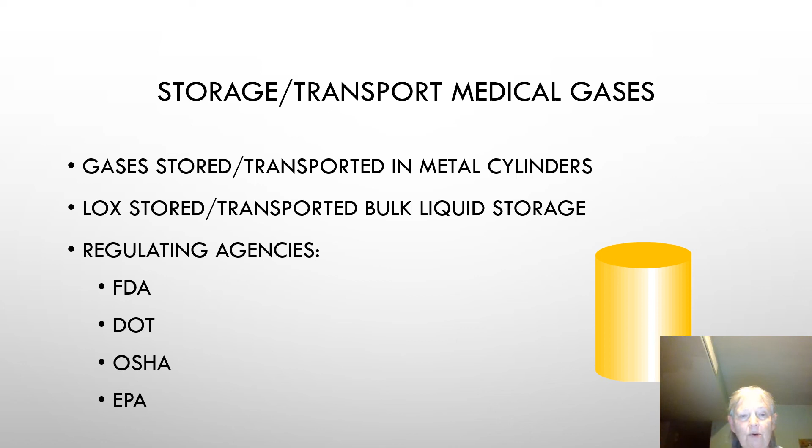Cylinders have been around since 1888, and George Barth is the gentleman who founded them. Prior to 1970, it was the Interstate Commerce Commission, and after 1970, the Department of Transportation took over.

Other agencies you're going to deal with: the National Fire Protection Association, which makes sense because if these things explode, they can cause a fire. The Compressed Gas Association are the folks who have come up with our safety systems to make sure that we're not going to have problems, hopefully not interchange and put the wrong cylinder valves and stems on our gases and cause problems with our patients.

One of the things we have with cylinders are good manufacturing practices. You need to follow those. If you don't follow those and something happens, you're most likely to lose that lawsuit that people are going to bring against you.

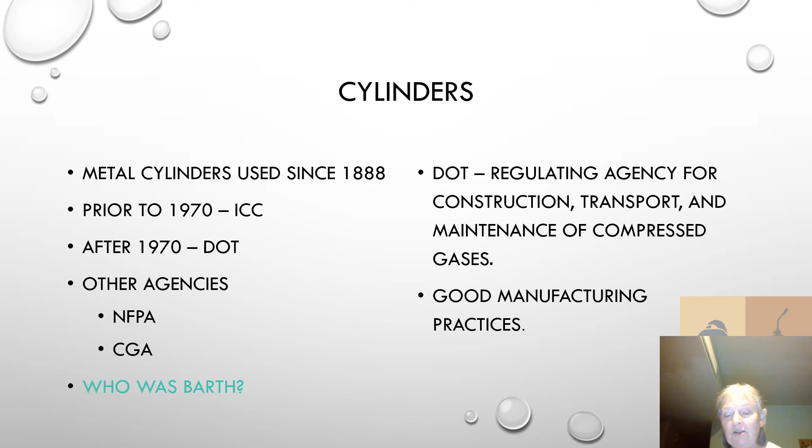So cylinders can either be spun or they can be stamped into their cylinder shape. It's interesting when you're reading a cylinder, sometimes you'll see the word spun on there so you know exactly how it was made. We have steel cylinders - these are your 3A, your 3AA. Here's the chrome-molybdenum, it's a steel alloy. Aluminum 3AL is another one.

Why do we have aluminum cylinders? Basically, you need these for your MRI, places like that where you can't have metal. They work out fairly well, plus they are light, so they're easy to move.

The lightest there was the carbon fiber. These guys actually fill to about 3,000 psi. We don't see that many in the hospitals. If you scuba dive or something like that, you'll see the carbon fiber cylinders being used because of their lightness.

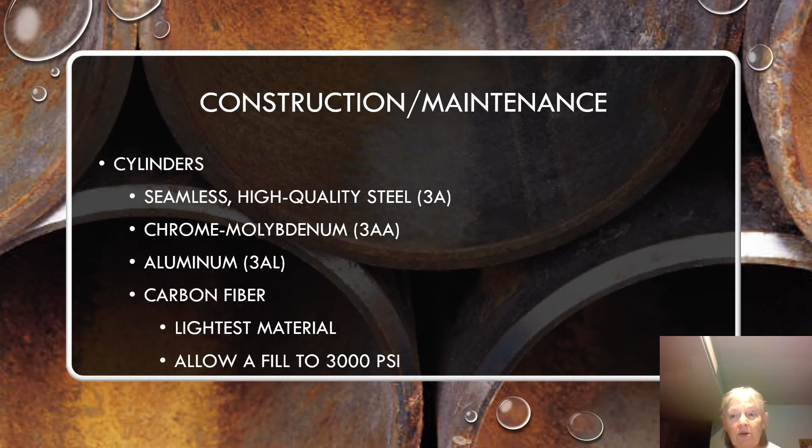So there it is. As you can see, the top is threaded, fitted with a valve stem. The bottom is welded closed. Most of your cylinders, except for your aluminum ones and the carbon fiber, have their own specialty as far as that goes. Should be capable of holding 10% more filling pressure than the service pressure.

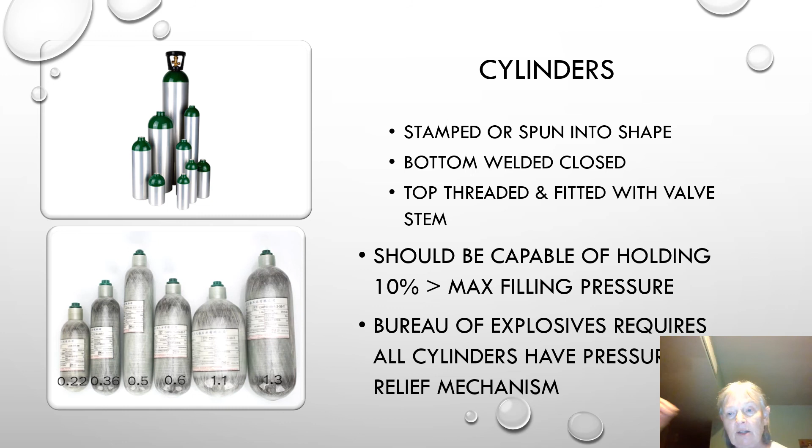And we'll see the service pressure on the cylinder itself. The Bureau of Explosives requires that each of these cylinders have a pressure relief mechanism. The cylinders get hot, and if they get hot, you have to release the gas. You have your frangible disc, your fusible plug, and a spring-loaded one that we also call release valve on the larger cylinders.

With a frangible disc or fusible plug, if those have been melted or released, the gas is going out - there is no saving any of that gas. With a spring-loaded one, it'll actually go out, release the pressure, then come back, so you still will have some of that gas remaining.

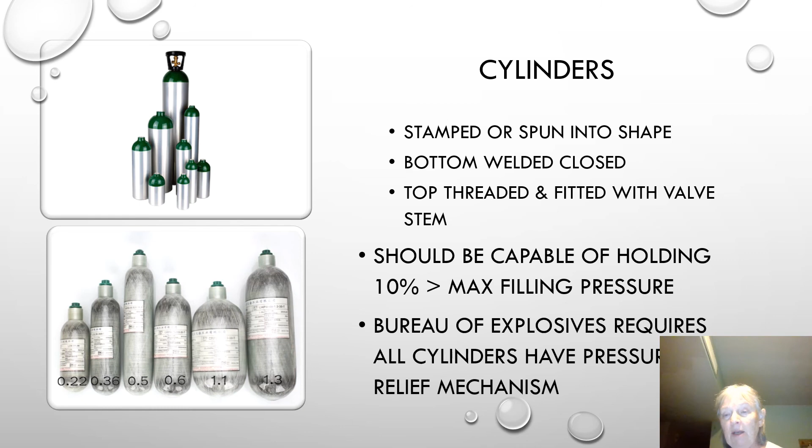So one of the things that has to happen is your cylinders need to be hydrostatically checked every 5 to 10 years. What we're looking at when we do this is, can the cylinder expand? If the cylinder is expanding and has expanded its entire life and continues to expand the same width or expansion, then the cylinder's in pretty good shape.

If the cylinder doesn't expand or expands too much, then that cylinder has to go to cylinder heaven - it can't be used anymore. There could be some corrosion, there could be some other problems with it at that point in time, but we definitely don't want to be using it for putting gas into it.

The cylinder is filled with water to 5/3 of its working pressure, and then on the cylinders you will see it'll say, for example, 17.5 cc. That is your cylinder expansion, or elastic expansion rather - that's your cylinder expansion that's noted on the cylinder for you.

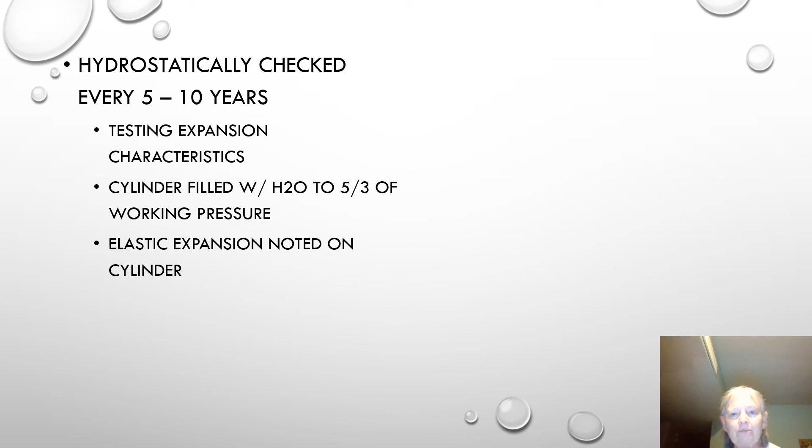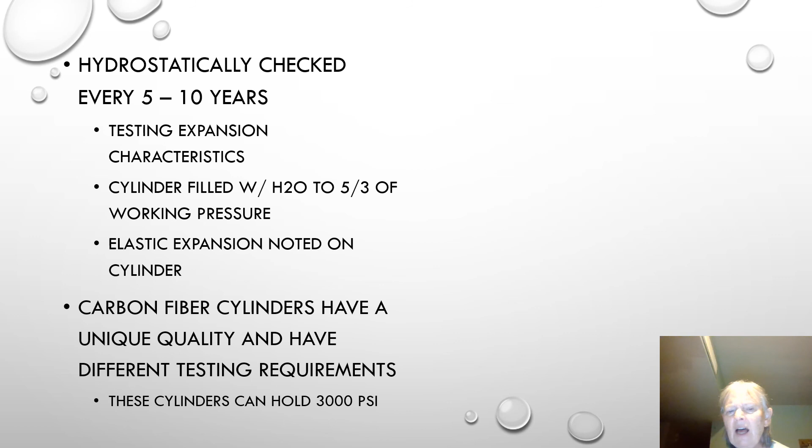Carbon fibers have their own unique quality, and they have different testing requirements. They have a life, and it's interesting when you read some of the information on them that they're good for about 15 years or so.

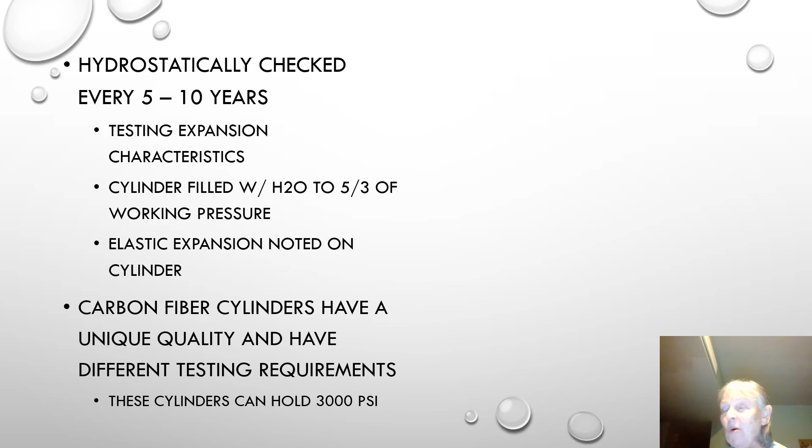We use the metal cylinders as long as they last. We've had in the lab on occasions some of them that were back in 1955. They look like they're pretty beaten up. They have some rust on them, some dings, minor dings on them, things like that. But they still hold their shape and still do the things that they need to do.

And there it is. All cylinders, except for the carbon fiber, have to go be tested every 5 years. However, if there's a star following the testing date, then you can test it every 10 years. That's not a problem. Now, the thing to remember about this is this.

Say that your cylinder was tested in 2010. It has a star on it, so it's going to be tested sometime this year in 2020. That doesn't mean that when 2020 comes to an end and the cylinder hasn't been tested, we'll empty out the gas and test it. We're not going to do that. What they're going to do is use the cylinder, so it's delivered in February of 2021. Once the gas has been used, then the cylinder will go in and be retested at that point. So that 10 years means it's going to be 10 years waiting for the testing date.

However, if it still has gas in it and it's still doing what it needs to, we'll use it, the cylinder and the gas, until it's empty at that point.

The other thing is your cylinders will sometimes have the star, and then when you're reading the testing information, you'll find out that maybe there was a 10-year inspection in 1985, say for example, and there's no star behind it. That means it has to be tested in 5 years then, not 10 years. But say it was tested in 1990 at this point, which was your 5 years, and this time it does have a star. We really don't know what happened to the cylinder, why it lost its star, and we don't know why it got the star back. It's just one of those things that's kind of interesting.

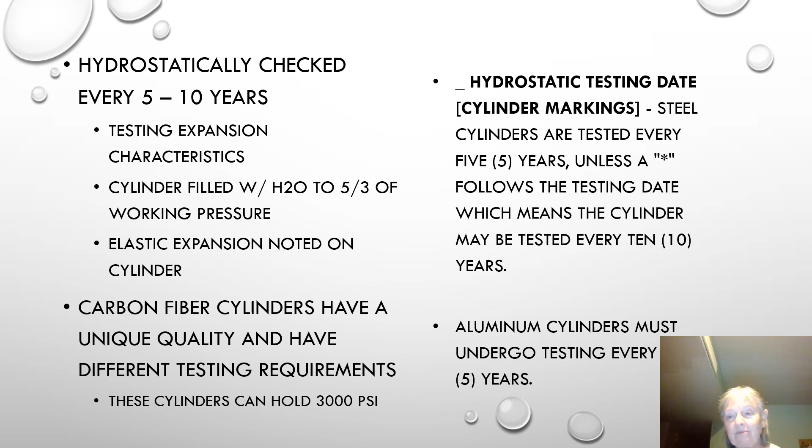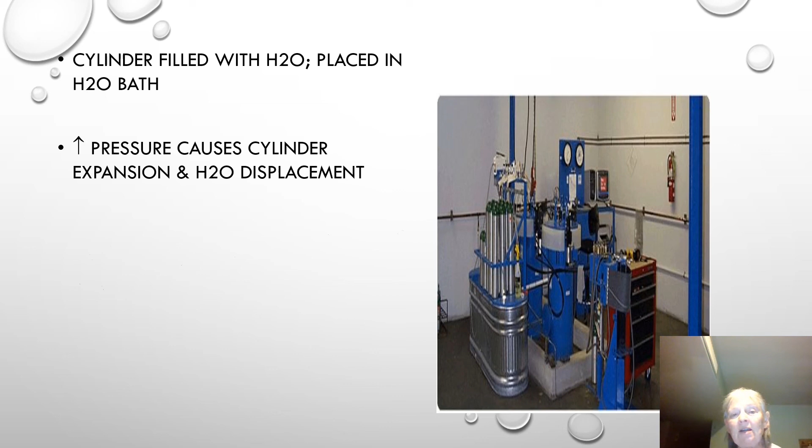Interesting. Aluminum cylinders, every 5 years. And there you can see a picture of the water bath. The pressure causes cylinder expansion, water displacement, as you can see with that, and there you get your elastic expansion at that point.

Think about this too. Athletes who don't have very much body fat, if you're trying to figure out what's going on with them, they immerse them in cylinder baths also, and they look at how much water's been displaced. Kind of an interesting testing for them too.

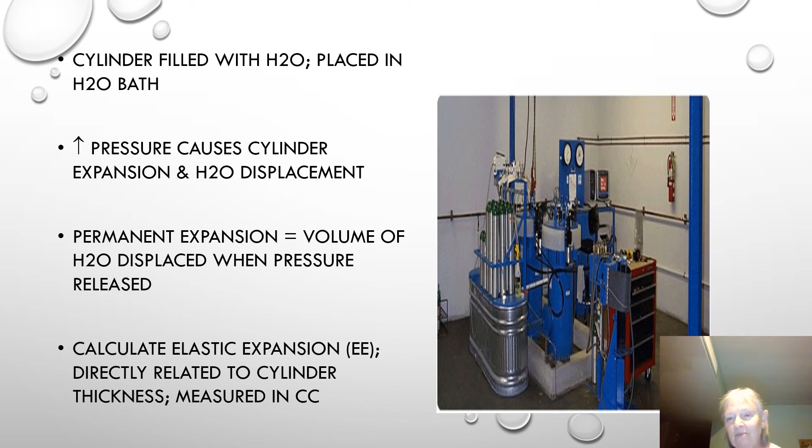So just a little bit of information. You can see what they do with these, how to take care of them. Doesn't mean much except just to show that to you.

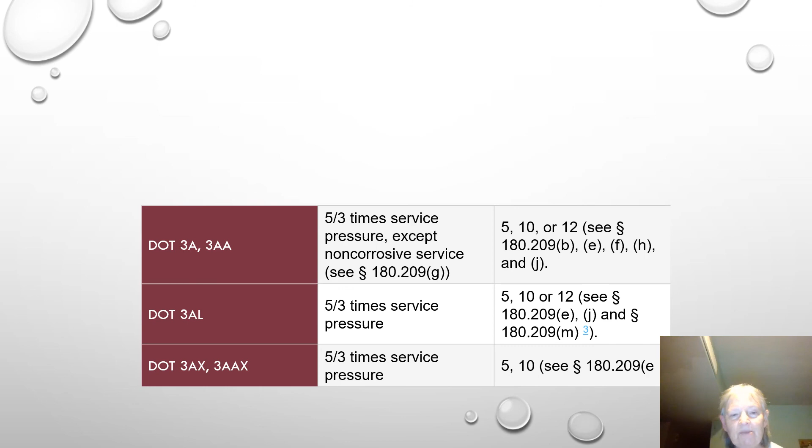The other thing is, though, we're going to look for external examination. Last thing you want to do is take a cylinder in and find out it has oil or grease on it, especially if it's a medical gas cylinder. You got to wonder where it was and what people were doing with it, okay? If it's been in a fire and it's expanding where it's not supposed to, these things find their way to cylinder heaven, and we never see them again.

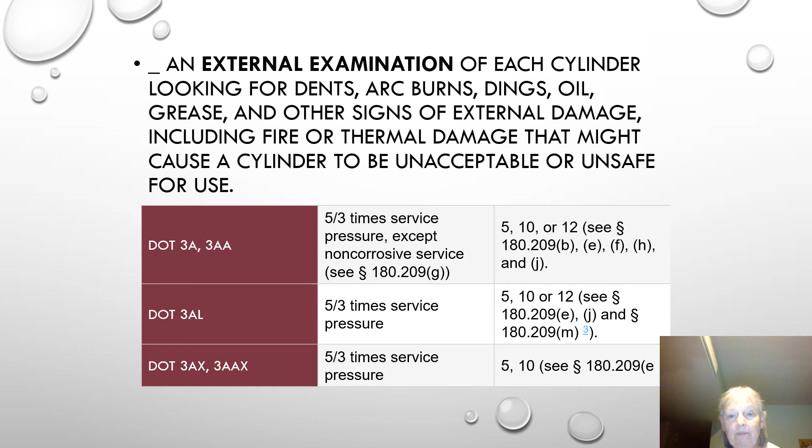The other thing, as you can see, venting or blowing down, drain it out. We're going to go ahead and put something in it.

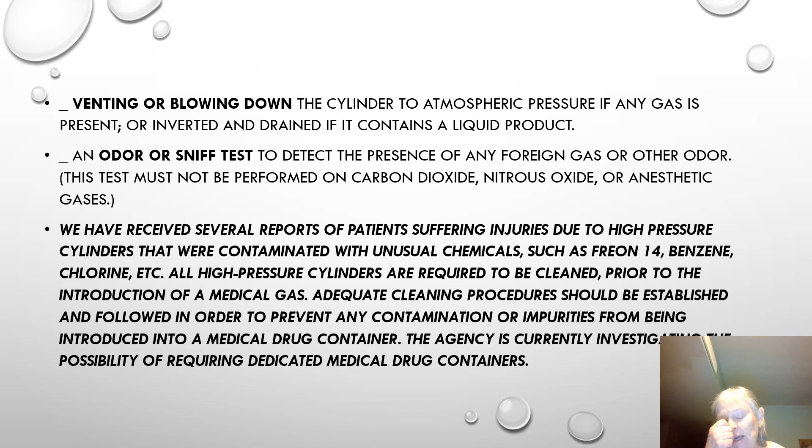One of the things the FDA tried to do at one time was to designate a certain number of cylinders just for medical gases, and that's all it would be used for. The cylinder folks came back and told the FDA, no, there's not enough deaths, shall we say, to justify us having to do that. So they still haven't done that at all.

So this medical gas cylinder could now hold something like argon or freon or something else, and then the next time may be cleaned out and have everything else done to it and hold oxygen. So you always want to make sure that those cylinders have been emptied out if you're going to work in that part of the field.

You have your odor, your sniff test, okay? You want to see is there something in there that doesn't smell right. However, if this cylinder, as you can see, is carbon dioxide, nitrous oxide, or any of the anesthetic gases, we're not going to do the odor or sniff test.

This is something that came out with the FDA. They report things about injuries that happened to patients. You can see some of this. This was freon, 14, and benzene that were in the high pressure cylinders that were contaminating the medical gases. So it's really important that that not happen.

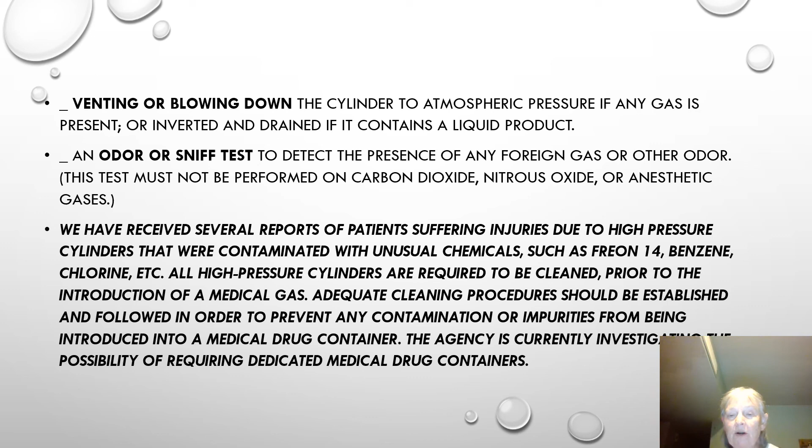Then they're going to do the hammer or dead ring test, and I've decided when I retired, that's the job I want. I can go around with a hammer and hit the cylinders. If they have a nice clear ding, ding, ding, then I know they're okay. If not, and they have a thud, thud, thud, then unfortunately they do go to cylinder heaven at this particular point in time. And like I said, you don't want to do these on aluminum cylinders because it's kind of hard to use super glue to put them back together. Most places aren't going to let you do that.

One of the things too is the labels. You're going to see this again, and I'm just going to bring it up here. If you're going to say take a green cylinder and make it gray for CO2, all the labels have to come off. It's not like your car. Remember with your car, they tell you just clean it and stick it on top of the old one. This doesn't happen here. The old labels, anything like that has to come off of the cylinders, and then the new ones placed on the cylinder.

Plus, they sometimes have like little grocery tags that they put on there. If those things are loose or falling off, you cannot use that cylinder. Everything has to be on there nice and tight and make sure that all the parts and pieces are there. And so, once you see that happen a couple times, you call the distributor and tell them you need to come get these cylinders. You need to bring me some new ones that everything is where it's supposed to be.

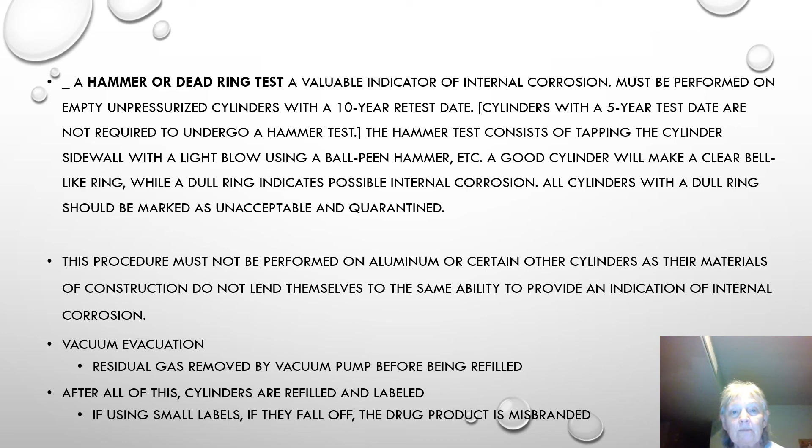And then the valve, you want to make sure it's the right valve. There's been cases where people have been delivering gases. They hadn't had their CGA training. And I remember one was in a nursing home. They took the oxygen valve off of the cylinder and put it on an argon cylinder. And then they used argon to pump into the nursing home. And about 3 or 4 people actually ended up dying as a result of that.

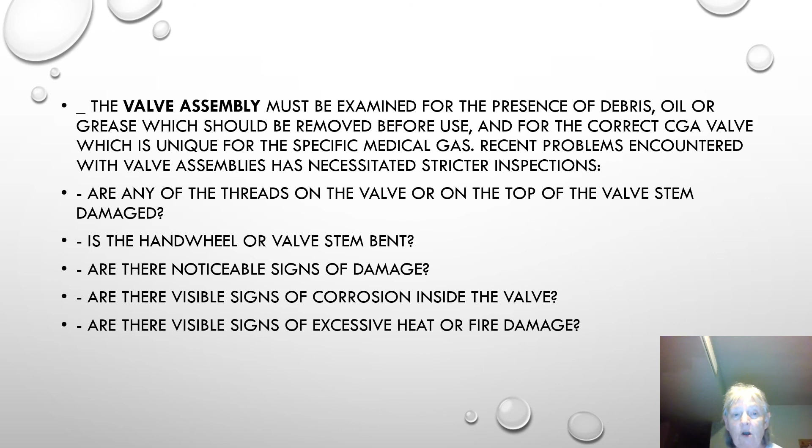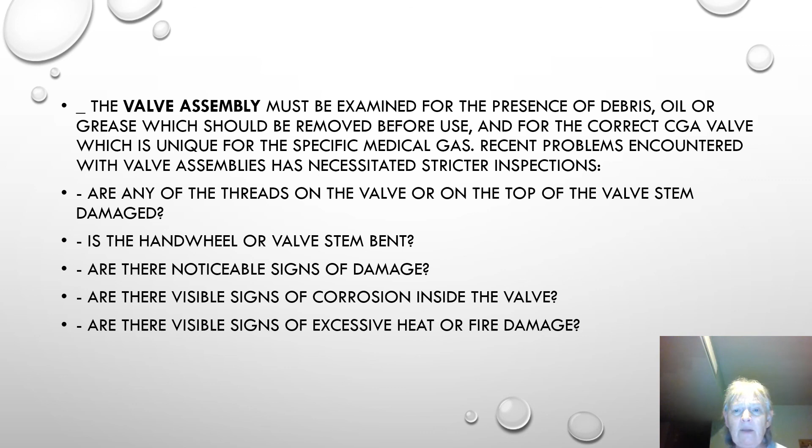So you always need to check and make sure that whatever the cylinder is, you can take and make sure that the right correct CGA valve is on it at that particular point. And then if there's any corrosion, any rust, anything like that, to where there's going to be a problem, especially with leaks or something like that, then unfortunately that valve can't be reused.

Now, the correct color is what the industry uses to make sure green is green in the United States. That's oxygen. Internationally, oxygen is white. And so you need to know if your cousin from Canada is coming to visit and they bring their white cylinders, take a look at it, make sure that it says oxygen on the label. That's how you determine if you have the right cylinder. People go, yeah, but green is oxygen. Everything that has green on it has to be oxygen.

No, it would be nice to think that, but that's really not what's going to go on at that point. So what we need to do is you can look at the color, you can find it. It's green, that should be oxygen, but you have to read that label. Once you've read that label, then you know whether or not you have the right cylinder.

There you see the different colors. Oxygen, like I said, in the US is green. Internationally, it's white. You will see white cylinders in your labs.

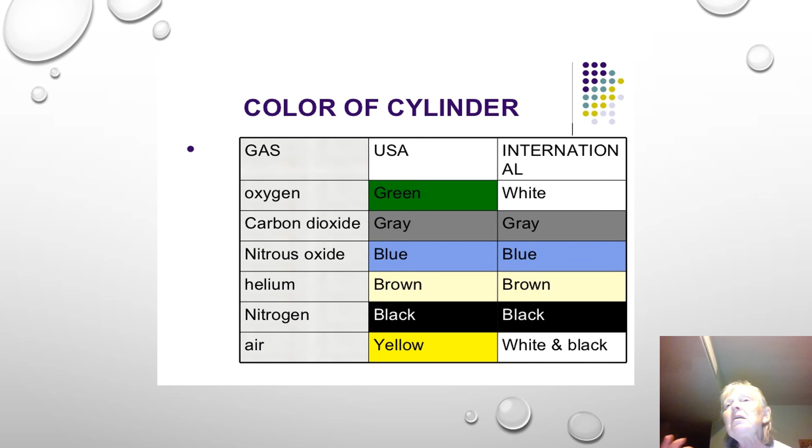One of the things I want to mention here: a lot of times heliox will get delivered to the hospital and people think we can just use it, it's already been mixed, we don't have to worry about it. You sometimes want to have that little bit of paranoia with you. Has that gas separated? It may not happen that often. People will tell you they've never heard of it separating, but there have been cases where maybe one or two did separate. What you need to figure out is, okay, what do we want to test for? We want to analyze the gas.

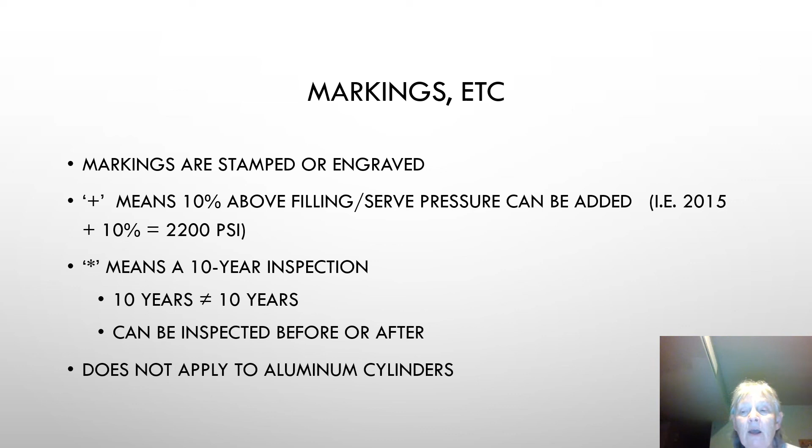So the markings are either stamped or engraved. The plus means 10% above service pressure. The star means 10-year inspection at that particular point. You will find neither of those on an aluminum cylinder. If you do, be kind of curious as to how that got on there, because it shouldn't be there at all.

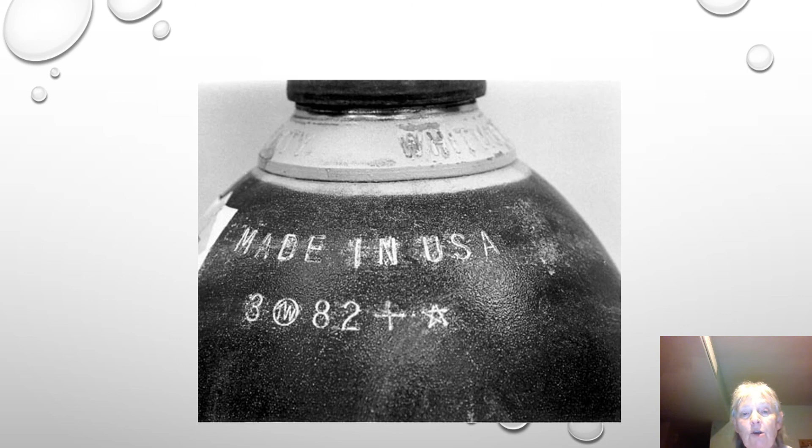And these are the markings, as you can see, nice and neat, made in the USA. You can see the 3 with the little thing in the middle, 82, and then the plus and the star. That little squiggly in the middle of the 3 and 82 is the inspector's mark. So if something happens to this cylinder and they get this 3 and the little squiggly with the 82, they know who the inspector of that cylinder was, and they can go back and talk with them.

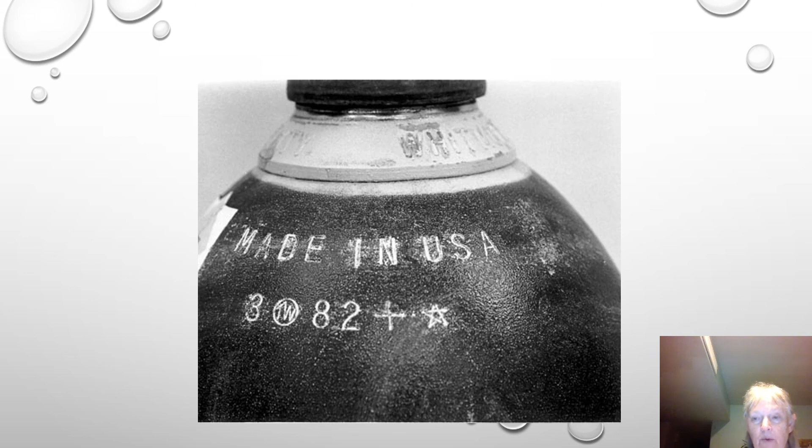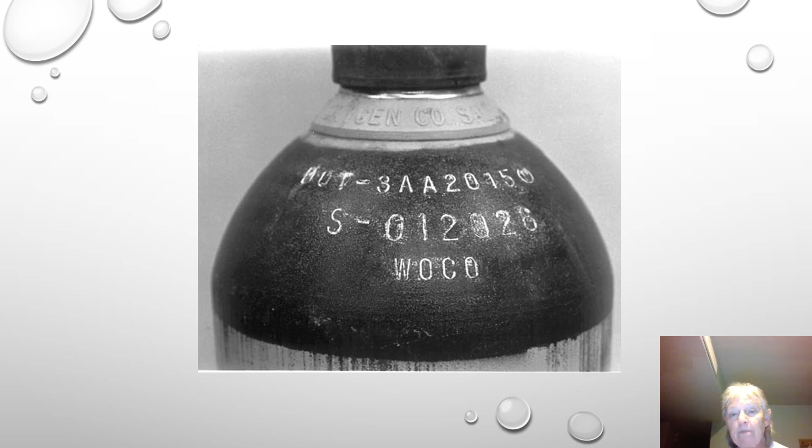Other ones we just talked about, these are the different ones for DOT, the types where you can have them.

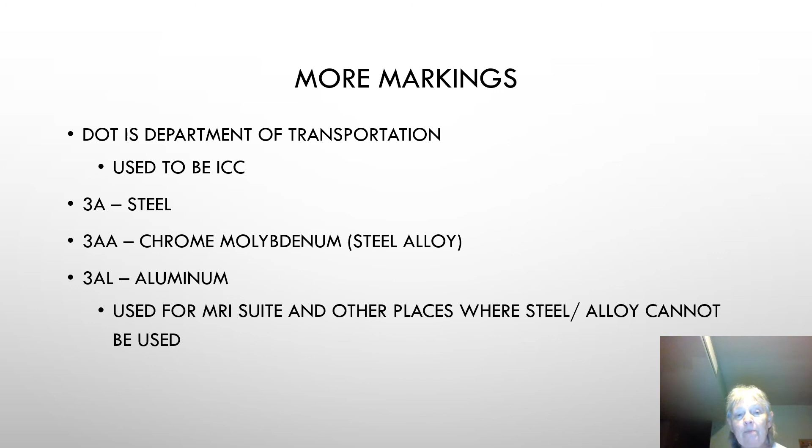This is the reason why in the MRI suite you don't want to carry any metal with you. Unfortunately, there was probably about 5 or 6 years ago a story that came out of New York. This young child, about 10 years old, was put in the MRI suite. They had an oxygen cylinder that was not aluminum in the room. They turned on the magnet and it went through the MRI device and unfortunately killed the child on its trip to the magnet.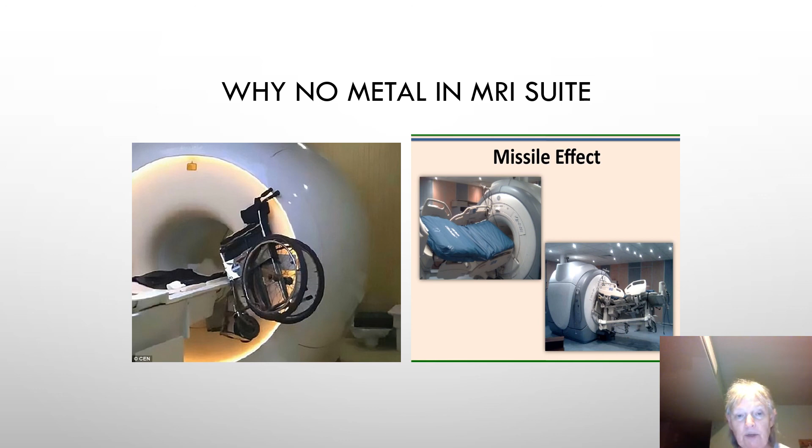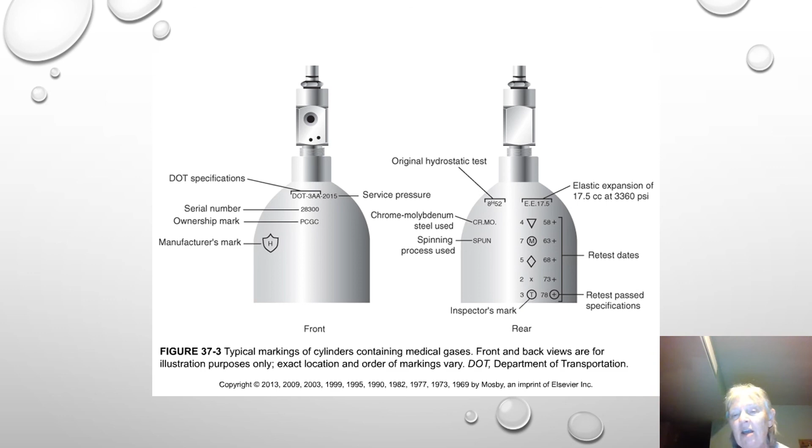You're not going to fill, but maybe if they're filling in your hospital because the people have the CGA training, you may want to watch and see what they do.

The two most common methods are going from liquid to gas, which requires a vaporizer or heat exchanger to turn that liquid into a gas, and gas to gas, where you do the heat of compression check. You make sure you can touch the cylinder - there's a maximum temperature you can reach. If you get there too quickly, you will definitely have problems with the cylinder. You want it warm, but you don't want it hot.

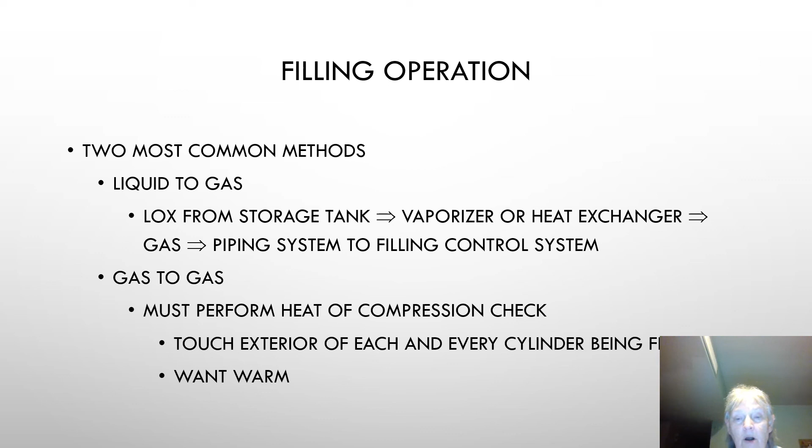You have to have good manufacturing practices. You have to be trained, and your equipment has to be certified. The FDA comes around about every two years and checks your books to make sure whatever you're doing is done appropriately. If you have an accident, they're going to be there to visit you in less than two years. If you have the wrong gas and somebody unfortunately dies as a result of it, they're going to be there also to check and see what's going on.

You have to make sure your cylinders are clean and safe, and you've got to know the lot this gas is coming from. It's hard to think about it - you're going, well, this is a medical gas, it should be purified 99% at least, and everything should work. But how can a gas get contaminated? It could be just one little slip, it could be something else going on, it could be bad air, it could be anything. So you always need to be able to identify where that gas came from.

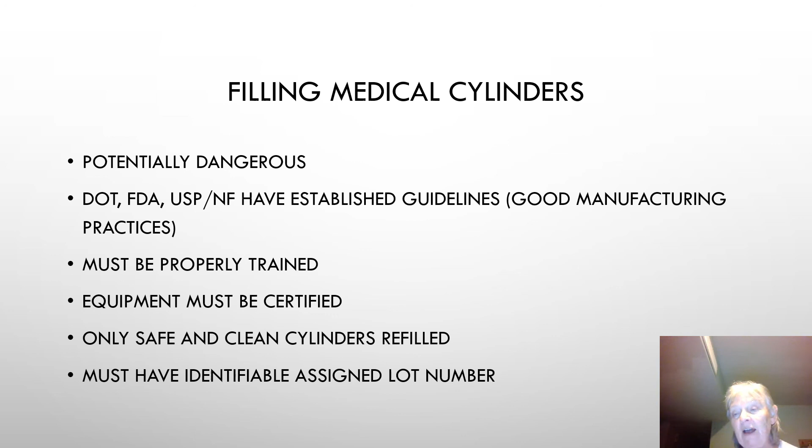So the things you do: you have to do your pre-fill, you have to do your filling, you have to do your post, and then you have to document. Just in case you're wondering if it has to be documented, it does. It has to state that your equipment's calibrated and everything is as it should be. You can see the fill rate is less than 200 psi per minute, and temperature is basically 70 degrees, and it has to remain less than 130 degrees Fahrenheit.

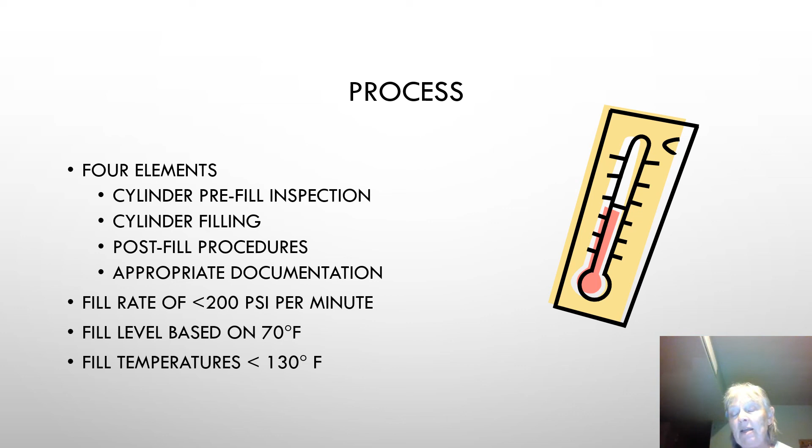So liquid gas has a different way of being filled. It's called filling density, and sometimes people have a hard time understanding what that means. Filling density basically is this: we're going to take this cylinder and fill it with water. Now we know how much the cylinder weighs, and then we're going to empty all that out, make sure there's no water in it, and put the liquid gas in it up to the weight that the cylinder was when it was filled with water.

CO2 and nitrous are the two that can be stored as liquids. CO2 is like 69%, nitrous around the same area at that particular point, and that's all that goes into that cylinder. You cannot fill it up to the top - that's one of the things you need to remember. It's a ratio between the weight of the gas compared to what the weight of the cylinder was when it was filled with 100% water.

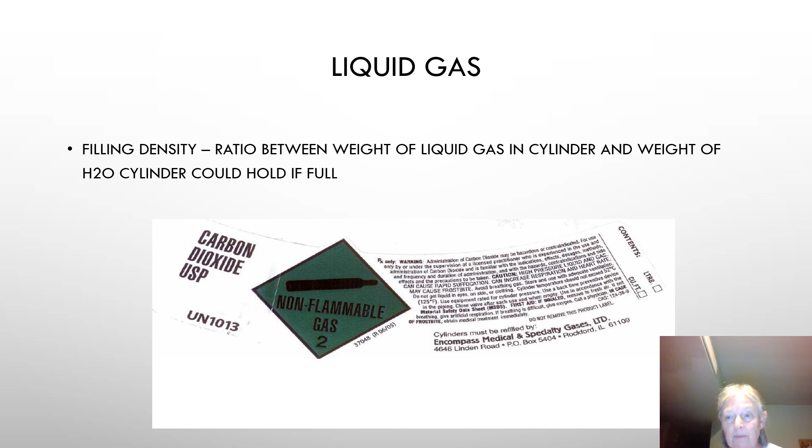And there's your labels. They have to have hazards on them, precautionary statements. If this falls over and the cylinder valve breaks off, then you need to leave the area - you have to leave for at least 15 minutes. Don't be walking on the carpet or anything at that point. If there is exposure, who do you have to contact, and what do you have to do if you're a recipient of it? That's one thing you don't want to do because gases are cold. And then it also has the purity on it.

Sometimes that label will also tell you how the gas was made. It would put fractional distillation, air purification, liquefaction, things like that too. So you can find out how that gas was made.

Cylinder valves control the contents. We don't want to release the content until we're ready to do so. It has a chrome-plated brass body, threaded inlet connectors. These are where our safety systems come into play, in a stem that opens either by a hand wheel or a handle. There's the little handle.

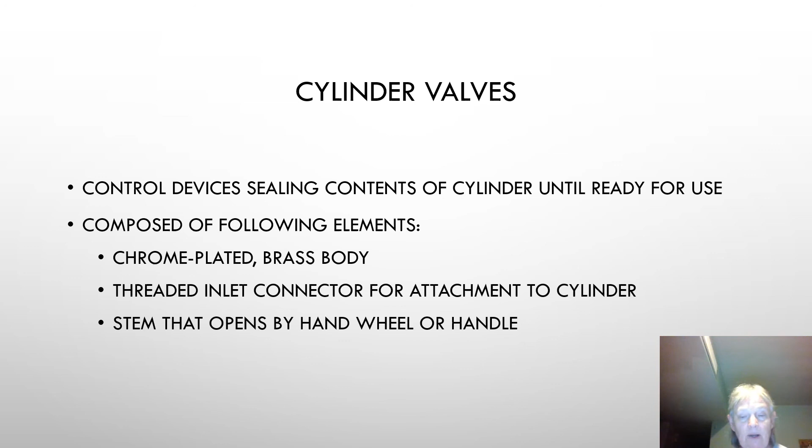So it has the outlet for attaching our regulators, pressure reducing valves. They have a pressure relief valve on it. You don't want that cylinder to blow up. I'd rather lose the gas than lose the cylinder and the people around it too.

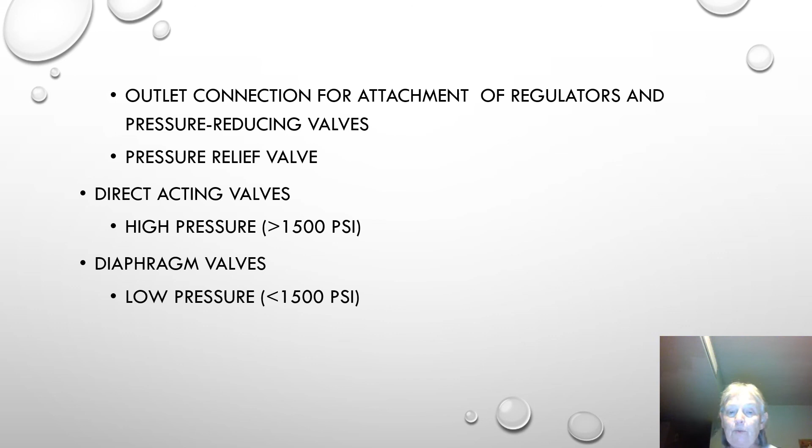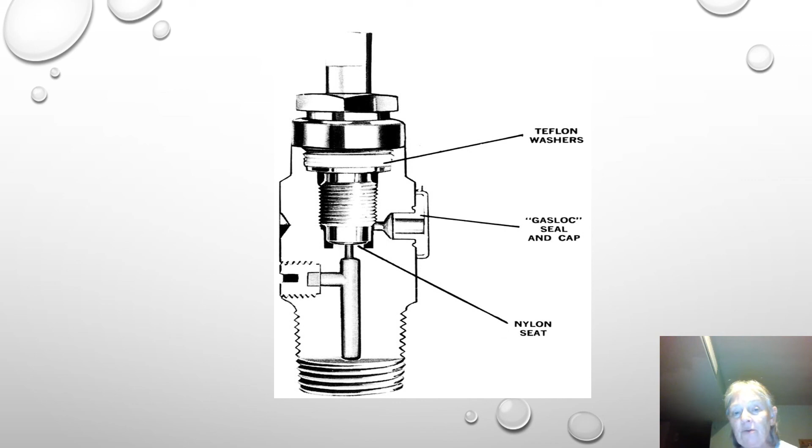And then you have direct acting valves. These are high pressure, greater than 1500 psi. The diaphragm valves are low pressure, less than 1500 psi. This one just shows you a direct acting one. You've got some Teflon to prevent leakage at that particular point. What you do is turn the threads and the gas goes in, the gas goes out.

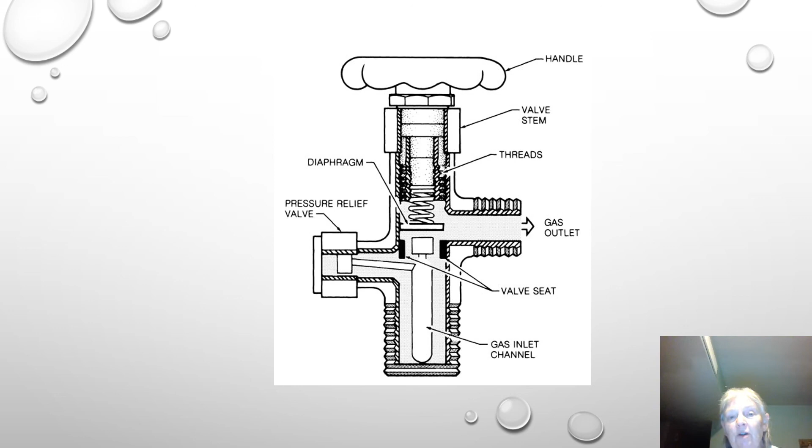So there they are, frangible disc or fusible plug, and those are on our small cylinders. Cylinders actually come in two sizes, and I probably didn't mention this at the beginning. They're either large or small. There's no medium. From AA to E is small. Anything above E, your F and on up, those are your large cylinders. And the large ones are the ones that have the spring-loaded safety release on them.

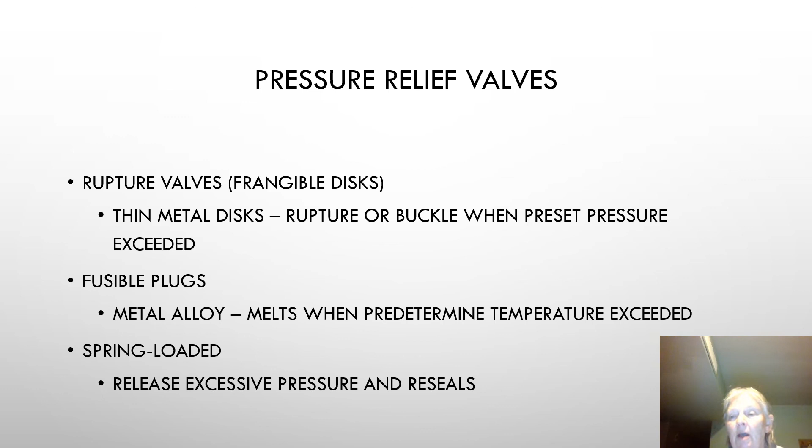So the CGA has come out with a system. When you look at the regulators, the reducing valves, you'll see that they're all a little bit different. They also have the number on them that tells you this is a CGA, and it'll also tell you the threads, internal, external, right-handed, left-handed. All of that information is on there. So if you want to read it, you can sit down and find out what that CGA attachment is.

Two major ones that we're going to talk about, these are for high pressure, 200 PSI or above: your ASSS, American Standard Safety System. This is for the large cylinders. The Pin Index Safety System, or PISS, is for the small cylinders. But all of them, the CGA regulators, reducing valves, all have a specific number that goes with the gas.

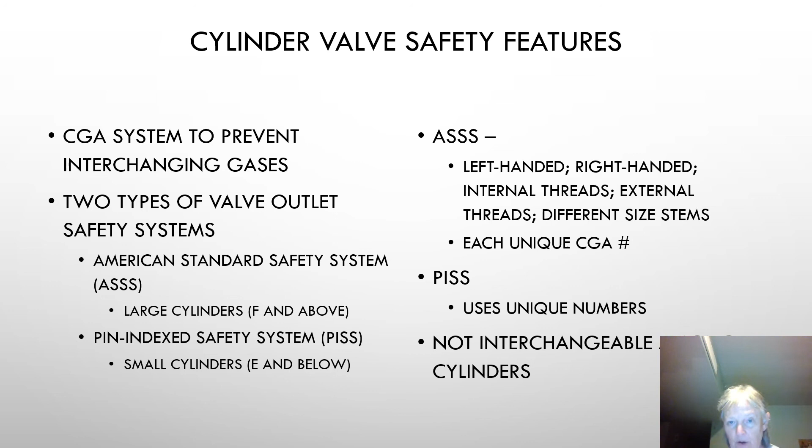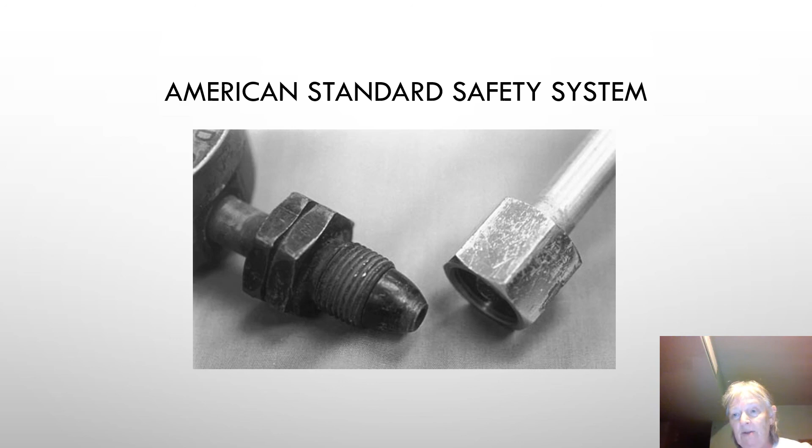Anyways, you can see the threads. These are external threads, and the other one you can't see really well, but the internal threads, two different ones, and there is no way to interchange them unless you actually make changes to the valve stems. They are what they are.

And then the Pin Index Safety System: 1, 2, 3, 4, 5, 6, as you can see. Oxygen is 2 and 5. Medical air is 1 and 5. And you can see how there's a slight dip from that 1 to that 5.

We have the valve stems for aluminum cylinders are aluminum. In some cases, the valve stems are still brass, but the regulators and reducing valves are actually aluminum. What has happened is that the pin index safety system, when we put those on in the pin and yoke system, there's actually a little washer - they've gotten better, but back in the day, even a couple of years ago, there was a little washer on the regulator reducing valve, and this washer had to be changed every time.

There were some that had a little rubber portion in the middle, and they could last a lot longer. What would happen is people would have an empty cylinder, they would take the regulator or reducing valve off, and not replace the washer. Then the washer would leak. So they would tighten down the regulator or reducing valve on the pin index safety system, and unfortunately, because it's aluminum, after a while it'll start to bend.

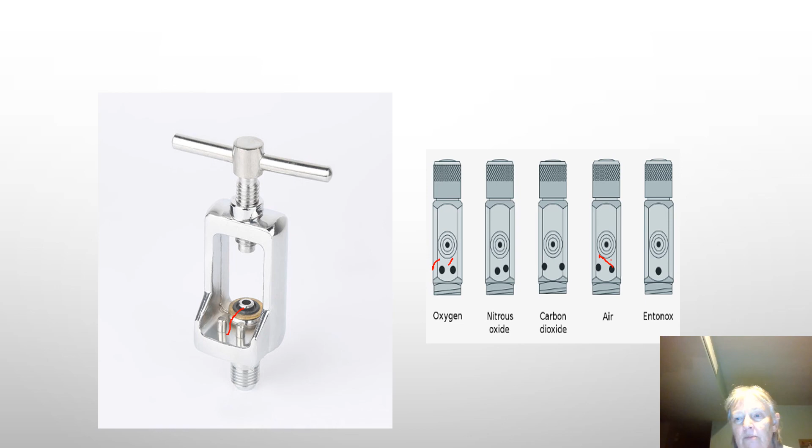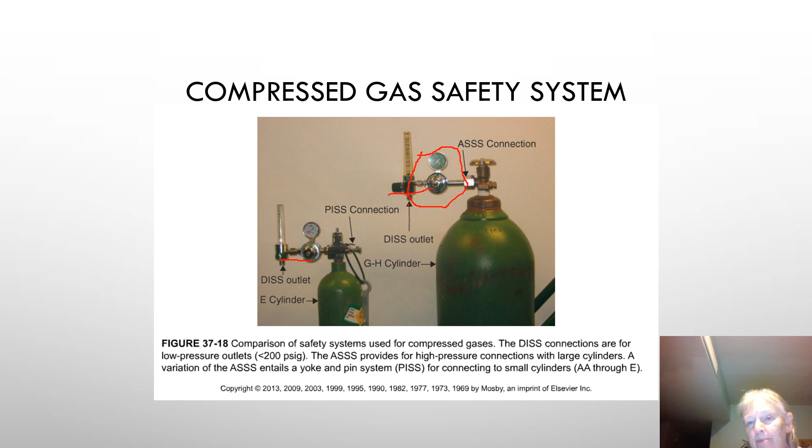These are little labels. Sometimes you won't see these in the hospital anymore. People got very lazy. They wouldn't put them on. People would pull them off because they didn't know what to do with them. If you were in the vet program, you'd find out they're very good about these. They use these all the time.

So how do you protect yourself? Don't roll the cylinder. It has to have a cart, okay? It has to be rolled in the cart. And you can't throw it over your shoulder and you can't kick it along the floor or roll them.

I would love to tell you that you're always going to see cylinders in the carts or approved stands where we can put these cylinders. I can't tell you the number of times we saw them laying on the floor or laying on top of a cart on top of all the other cylinders. You gotta make sure you watch that. That is not safe at all. So you always have to watch those cylinders. Be aware of what's going on around you with them too.

The other thing too, when you're moving them, you should have the regulator reducing valve not on them. The cap still should be on. You have to close the valve after using the cylinder. Unfortunately, that does not happen that often, so always be aware of that.

Don't bounce them off each other. People like to do that for some reason. I think they like the little bell sound with them. So just be careful with them. The cylinders are a little bit more dangerous than a lot of people realize. And unfortunately, it's not until somebody gets hurt or something else happens that they go, oh, I didn't know that.

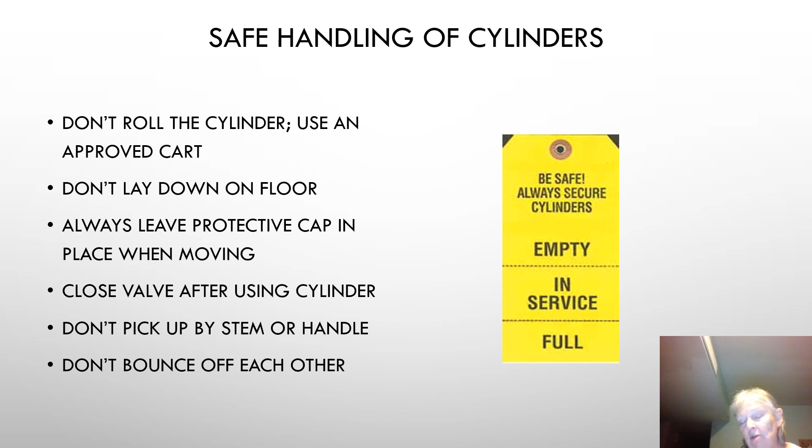So you want them in a nice, cool, dry, flame resistant area. The flammable gases have to be away from the oxygen for some reason. I'm not quite sure why.

Empty and full cylinders - it is a trip sometimes. You're sometimes looking for a cylinder to take a patient somewhere, and you can't find them. All of them are empty, and you're like, oh my gosh, I cannot believe this. And so sometimes you have to do a room-to-room search to find those cylinders. So be aware of that. And then don't smoke around them.

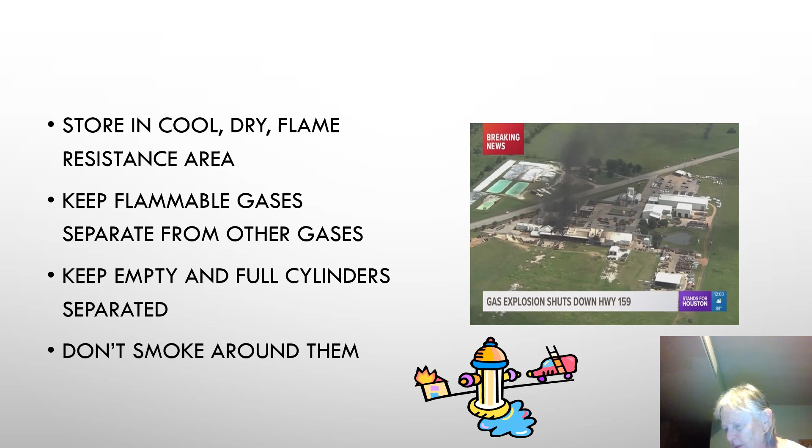In case you're wondering, this is what happened when some gas exploded. There were some cylinders. It shut down the highway. There's a really cool story if you ever have an opportunity to go look for it. There was a 6-lane highway in Texas, and these people found a cylinder in the junkyard, and they took it

to their buddy and said, hey, can you fill this? And their buddy, who should never have done it, did it, but all the gas leaked out because the safety system had blown off of it. So they went ahead and welded it back on and brought it back, and he filled it again. And these two guys are driving around this 6-lane highway, and they stopped for some reason, which was really cool. And the cylinder exploded, sent one of them 150 feet down the road, took off and went across all 6 lanes, across a grassy field, excuse me, and into this apartment. Guess what? You go home and you got a cylinder in your apartment that blew up your kitchen.

One of the students we had, a couple of classes back, about 3 or 4 classes back, was actually in Texas at the time that happened. She said it was kind of interesting to see what happened with it.

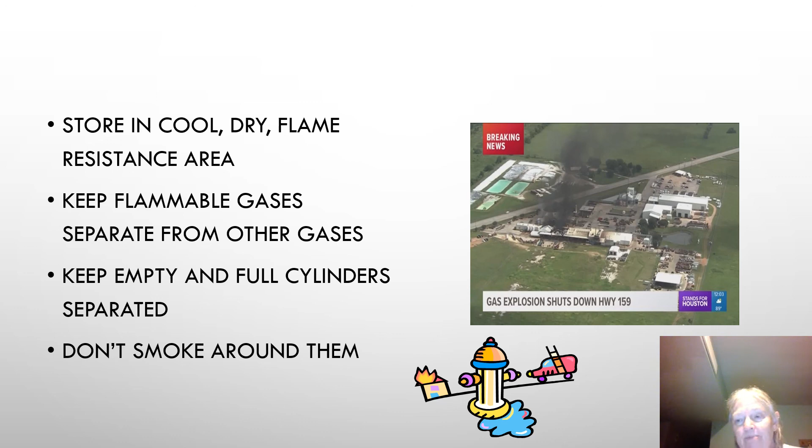And this is a gentleman, probably won't talk to you, but he's going to tell you that things blew up. Oh, yes, you can. So you should be able to click on it.

So how do we go ahead and manage this? Because this is something you as a student/respiratory therapist are going to have to do. Sometimes what happens, we'll talk about this with the piping system too, is that they'll take the piping system down for maintenance. When they do, you got to put your patients on cylinders as a backup. So you need to have how to deal with them too.

First of all, like I said, you have to find the correct cylinder. Remember, you're going to read the label. Do not rely on the color. Second, secure it.

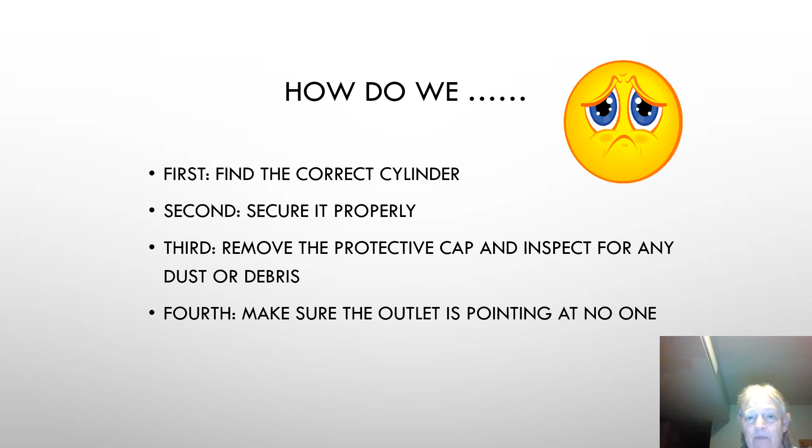You just can't hold it between your knees and decide to try to put something on it. Unfortunately, that doesn't work. Remove your protective cap. Do you see any dust or debris? If you do, you're going to have a problem because if you turn it on, you can explode the cylinder. And you want to make sure it's not pointing at anyone.

If you see someone walking down the hallway and they go, can I watch? Can I watch? I can stand in front of it. You might want to tell them you need to move.

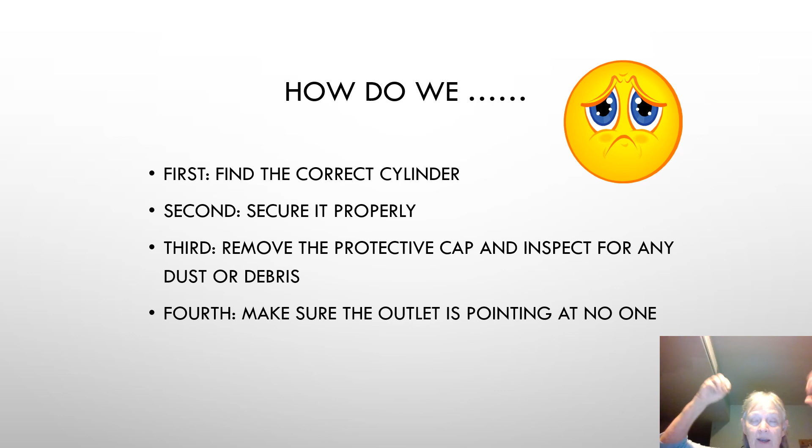There's 2200 PSI coming out of this. It's interesting, sometime in the lab when we would turn this on, we would turn them around and face the blinds. We had blinds at that point, and people would do their cracking the cylinder, which is on the next slide. I'm going to show it to you, and the blinds would go whoosh, and all the dust would fly all over the room. And students would go, is that how you dust this place? And I told them, yeah, that was the best way to do it.

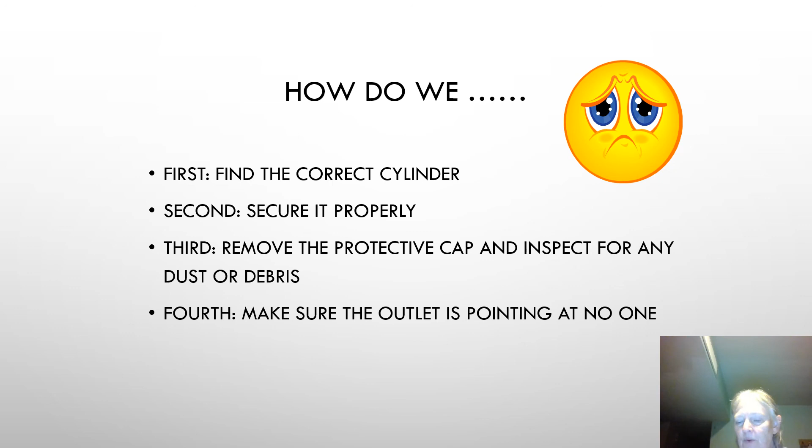So it really sent the blinds flying. There's quite a bit of pressure behind 2200 PSI. And then what you do is announce very loudly, cracking the cylinder, because you want people to know that they shouldn't be standing in front of it.

Now, cracking doesn't mean that I'm going to turn it on and go, hey, this is really cool, look at all the gas coming out. It's a very quick on and off. The reason we do that is to make sure that if there was any dust or debris, we're not putting it any further into the regulator reducing valve. We're actually going to blow it out of there. So that's the reason why you do it. It's not bleeding the cylinder, it's just doing that part of it.

Okay, what happened here?

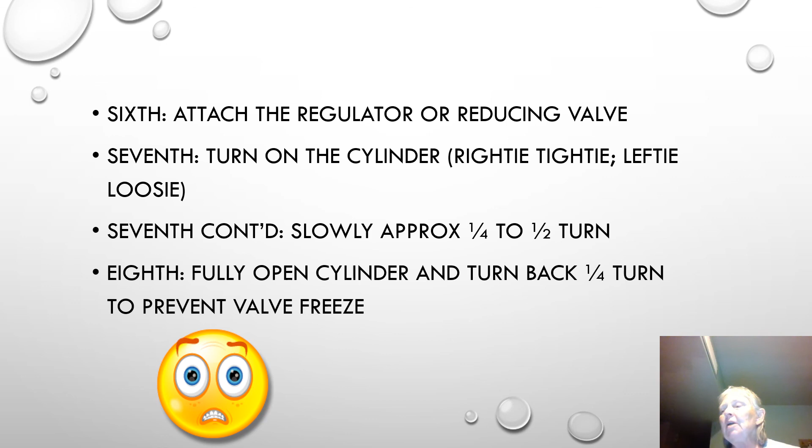So the next one then, after you do this, you're going to attach your regulator or reducing valve. People will tell you righty-tighty, lefty-loosey, this is turning it on, turning it off. When you turn it on, as you can see, it's slowly like a quarter to a half a turn. It's just like your gas cap. If you read the little label in the gas cap, it tells you open it slowly.

That way you don't have that pressure that's going to cause it to blow out. And the same with the cylinder, we're going to do the same thing. Once you've done that, you're going to open up fully, and then you go ahead and turn it back. When you turn it back, this prevents valve freeze.

It was probably about the second lab that I was running. We had a cylinder of air. They had been using it. They closed it, and when they closed it, it didn't close. As a result of that, we lost all of the gas in it, which is not a problem because fortunately nobody was hurt. So anyways, something like that can happen. You have to be careful with it.

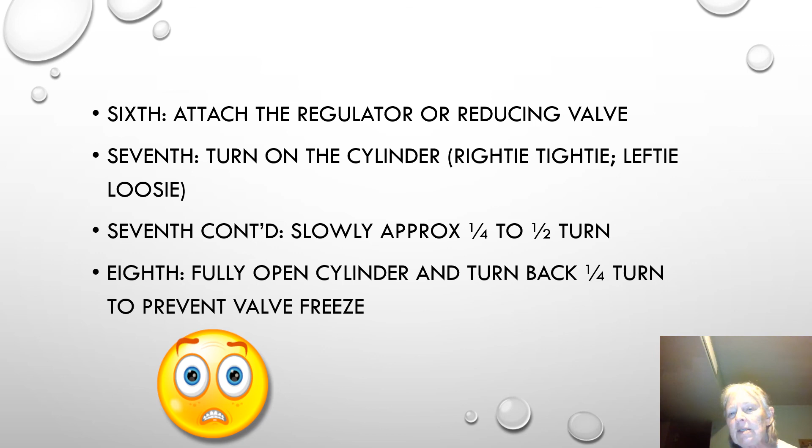This is what you need to know with the quick DISS too, and especially the quick DISS. When you put that flow meter in, do not take your hand off it until you hear it click in. If you just put it in part way and let it go, it's going to bounce back at you. You just released 50 psi, okay? And you don't want that thing flying at you or at your patients. The same when you take it out, you're going to go ahead and hold it until you get it out. You have your hand on it and you'll feel it release, and when you do, you go ahead and take it out, okay?

Now, an NBRC question is basically this: you just went ahead and released the DISS, took it out, and now you've got 50 psi coming out of the DISS. What are you going to do? The answer is put the flow meter back in, because the flow meter will stop it. The problem is the valve seat in the DISS is no good anymore, and you don't repair that. That's part of biomed, that's their job. So you tag it and tell them they need to come fix it. That's one of the really good questions.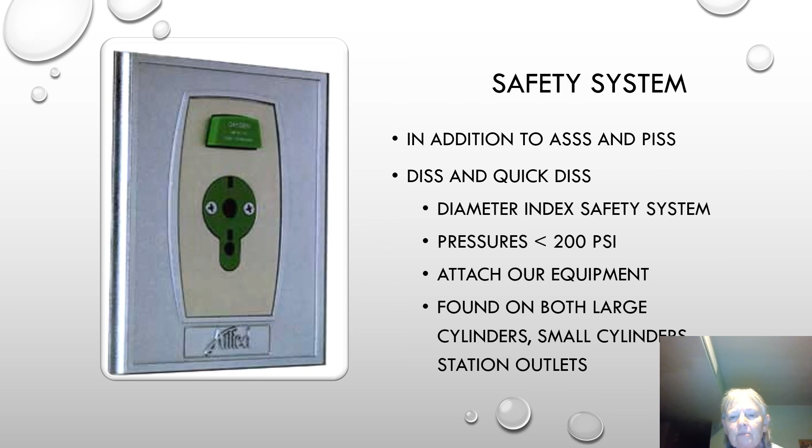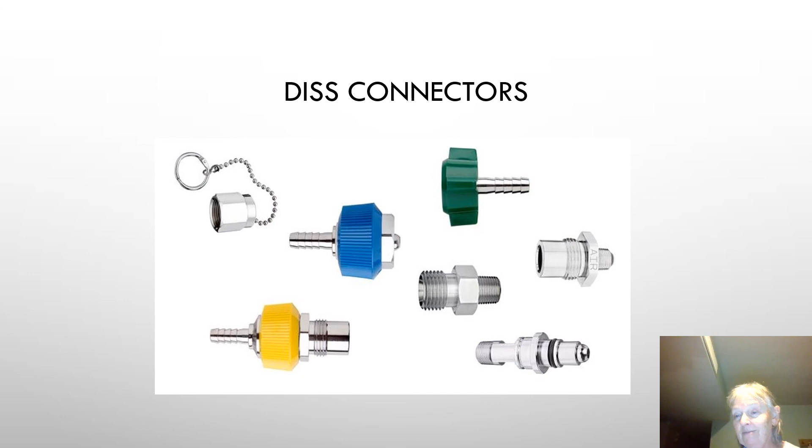And these are all different types of DISS you can see at this particular point. Guess what green is for? And then guess what yellow is for? The nice thing is we like to color code everything, and we like to put names on everything.

With these little pipelines at this point, if you see this is blue, up here would be the name of this. And what's blue? You guys know what that is - it's part of your homework. This is your yellow, this would tell you medical air. Over here, this is going to tell you oxygen, okay? This is going to tell you oxygen too. So it's one of those things where everything is color-coded and has a name on it.

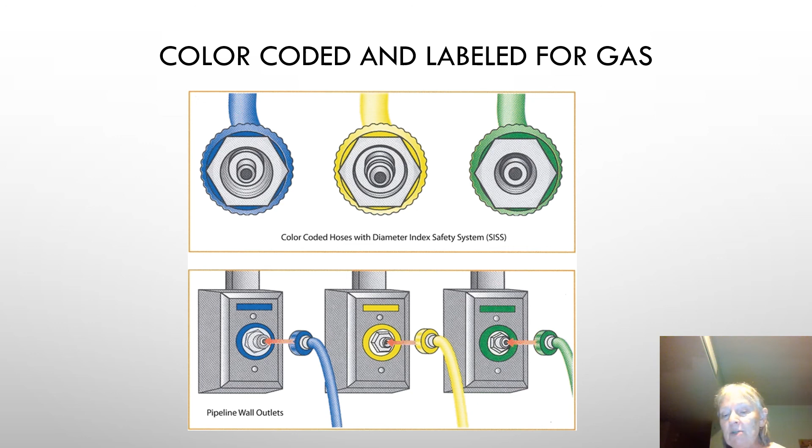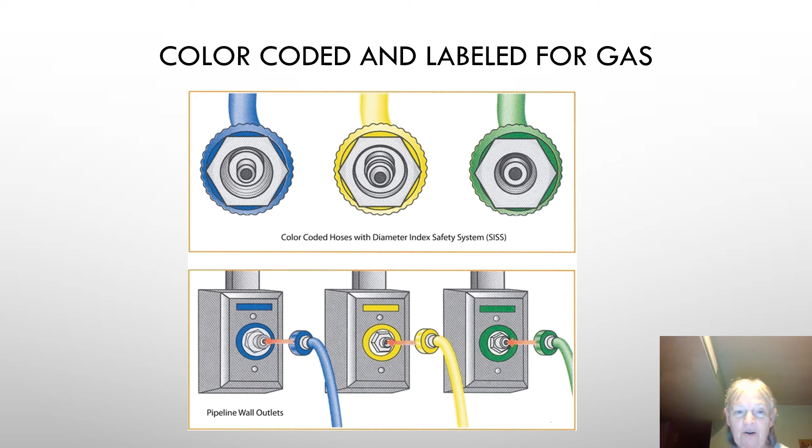Now, one of the things you'll see are the little bitty Christmas trees. The little bitty Christmas trees are where we sometimes put our nasal cannula and our small bore tubing. The requirement now is they either be black, white, or clear, because unfortunately we used to put the yellow ones on the green and the green ones on the yellow, whatever colors we happened to have, just to put it on there. And then people would go in and see a green Christmas tree and hook up the patient to it, and you'd walk in and go, why is the patient on medical air? Well, the Christmas tree is green, therefore it has to be oxygen. I have to tell you, the Christmas tree is a piece of plastic. It is not magical, it does not change medical air to oxygen. So in order to make things much, much better, now we're color coding everything and trying to follow through with it.

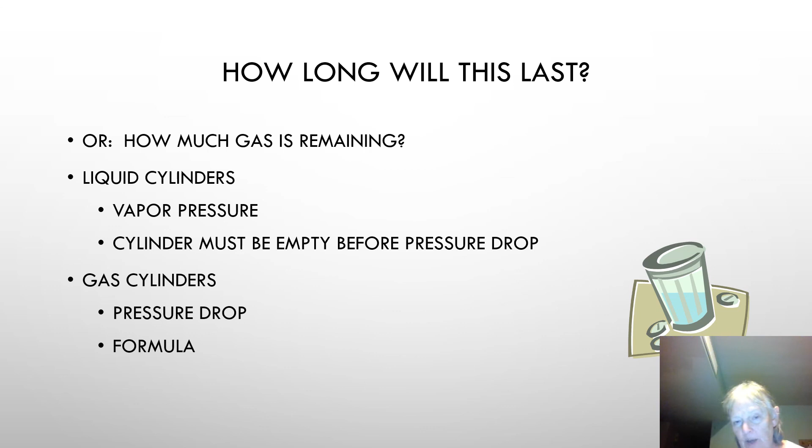So this is what we're going to talk about with the next one: how long do cylinders last? Basically, you have either liquid or gas. With gas, when we use these cylinders, we see the pressure drop, so we know what's in that cylinder. With liquid, the gauges are never going to drop until the liquid is gone and the last remnants of the gas are gone also. So the only way to find out what's remaining in the liquid cylinder is you have to weigh it - we're going to weigh the weight of the gas. So there's two different things we do: with gas we can read the PSI, with liquid we have to weigh the cylinder.

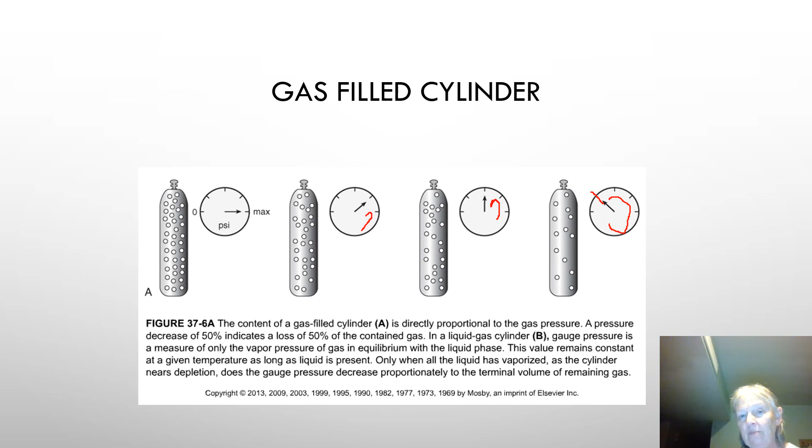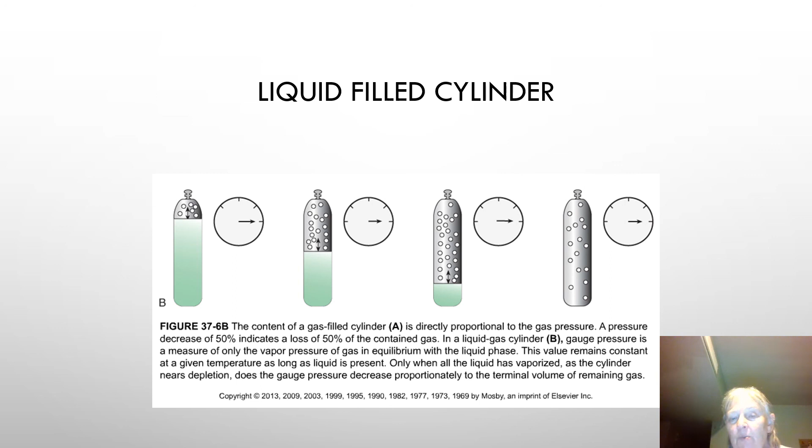The liquid one, if you notice, it doesn't move - never. If these molecules left, then this would drop. What's happening is the molecules are going in and out of the liquid, and as they go in and out of that liquid, they are still exerting the same pressure. That's the reason why you have to weigh the liquid cylinders.